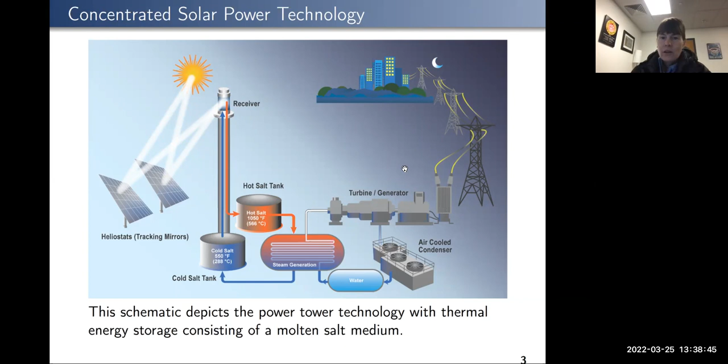It's got a very storied career. It's functional now, more or less. There's been a lot of issues. This is a mechanical engineering situation with the parts. So I mentioned that we had molten salt cycling through.

Well, most of the heat exchangers, like the evaporator, superheater, preheater, reheater, all those components, they're used to having water and steam go through them. And now all of a sudden it's like, well, we're going to put salt through you guys. And people thought this would just be fine and there'd be no problems, but no one really did simulations to figure out that there might be problems.

So that's been some of the issue with this, not so much the operations research or the system optimization associated with the power tower technology, but rather just the way that the moving parts function. And that will come up when we look at the objective function and what makes a particular dispatch strategy better or worse. Right? But so this is the main one we have here.

And unfortunately, that's an implicit model, but I'll talk just a little bit about that before I talk about the explicit dispatch, which is also not easy. All right, so this is mainly work with John Cox and William Hamilton, and they've been looking at this hybrid optimization performance platform framework. This is something they've been developing inside the National Renewable Energy Lab.

And on the left-hand side, you see a macro view of what they've done, the concentrated solar power with thermal energy storage, the photovoltaics and the battery, within the so-called System Advisor Model, which is a piece of simulation software that looks at the fluxes and all these mechanical engineering style aspects of the system. It evaluates, if you give it a design, what is the utility of that design in terms of the power output and the amount you could possibly sell, and what you might have to pay in costs for parasitics and operations and maintenance.

And so that design is actually hooked to this dispatch I'll talk about in a minute here. And there's this back and forth with evaluating a dispatch relative to a design to try and figure out the best design. But as you might imagine, there's very few variables in this type of model. We can only vary a few things at a time because the evaluations are extremely expensive. And like I say, they're black box.

So we've been doing a little bit of work in that sphere, not because we can influence Tonopah, that plant's already been built, but there's been some international interest in, for example, parts of Northern Africa, as well as other places in the world: South Africa, China, Australia, Spain, Northern Chile and the Atacama Desert. These are all places that really lend themselves to this type of concentrated solar power, so desert atmosphere. And then the right-hand side is just a schematic of how the gray inset on the left-hand side works.

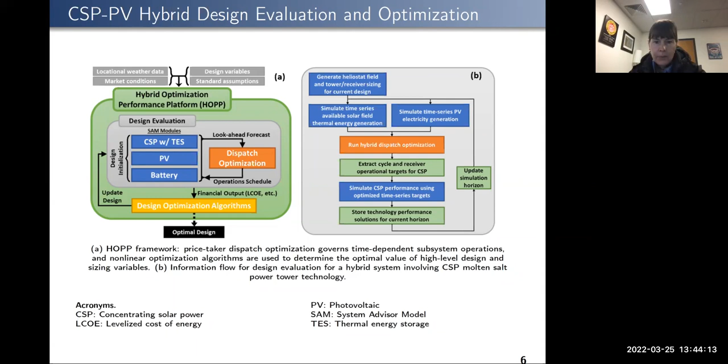So what we can kind of see from some of this is if you look at the design, you actually can be much better off than you might think otherwise, or than people did, for example, when they built the Tonopah plant. So nobody was really into optimization at that point. And so nobody thought about, well, what should we do? It was also difficult to characterize what various designs would yield in terms of operations and maintenance costs, or even profits and so forth. And so now that we sort of have a benchmark, we can say, well, things could be a little bit better.

And so for various pricing strategies, the Pacific Gas and Electric in Northern California, sort of in the Bay Area, and then these pool price, two-tier, and then the California Independent System Operator. Just looking at a few of the different pricing strategies, you can see that if you're looking at this black box optimization in which you want to sort of minimize flux, or kind of what you're putting on the receiver that's going to stress it, and you want to also minimize costs associated with running your plant, for all of the pricing schemes, looking at this sort of black box optimization, you can do quite a bit better in terms of the power purchase agreement price and in terms of the maximum flux.

All those negatives are improvements because we're trying to minimize. So we want our power purchase agreement price to be lower because then we're more competitive in the market. And we want the flux to be lower because then from a mechanical engineering perspective, we are treating the system, the metal and so on, better. So then the overall objective, when we kind of looked at this bi-criteria optimization problem, was a reduction between about 15 and 23%, depending on the pricing structure we're looking at. So that's kind of a really high level overview to the design problem.

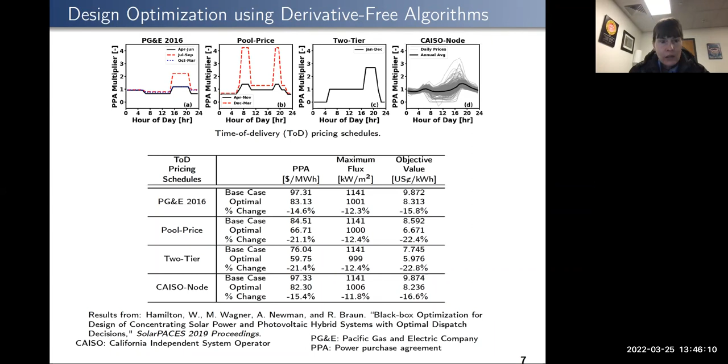And so what we'd like to do now is sort of take that design as fixed and go into the dispatch. And so now we're back in a more comfortable sphere, at least for me. So this is an explicit, I emphasize, mixed integer. In the first instance, we had a linear program. It was going to maximize the revenue generated from this electricity sales. But of course, we have other components in the objective. There's kind of 10 or 15 different terms, because not only do we have to take into consideration how much we can sell for, which is given by contract. So that wasn't something that we were optimizing.

So we were looking at that, but then the parasitics are used to run the plant. So whenever we decide we're going to dispatch power and correspondingly get the power from the field a certain way, we use some of our power to run all the generators and everything. So those are the parasitics, and we lose some in that. And then, of course, just from the general kind of operations and maintenance standpoint, the startups and the cycles into standby and so forth will cause some wear and tear on the system.

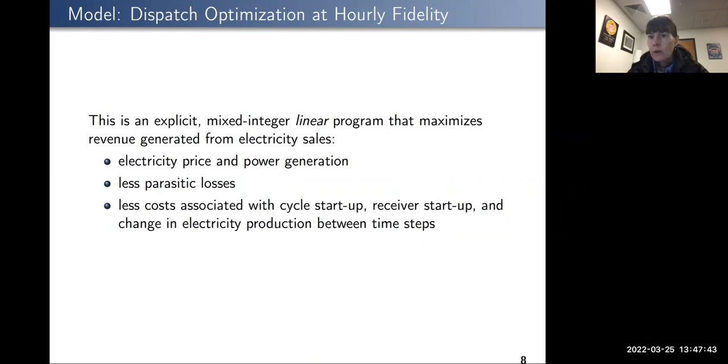And we were lucky enough that we could find, Alex Zolan was super helpful in this regard. He had done work with Dave Morton for his PhD, looking at the nuclear sector. And so there is a report out of Idaho National Labs that was able to get us a lot of the information on how badly the cycling would affect the system. So we were able to take that from a different system and use it in the solar power tower. And that was important because this technology is so new. We don't have a lot of, 10, 20 years down the road, how has all this wear and tear really affected your system? So all those parameters went into the objective as well.

So then we had quite a few constraints. I'm not going to show all the math here, but I have oodles of papers that I'm happy to furnish people with. So we essentially have sets of constraints for the receiver.

And then that was the heliostats in the tower you saw. And so obviously there's constraints on the startup and supplies and demands, the capacities, the logic governing the mode at which you're in. Like you can't be in standby if you haven't been running beforehand, or you can't shut down if you haven't been on for a certain amount of time, those kinds of things. And we have analogous considerations, again, all linear constraints for the cycle, the power cycle, that Rankine cycle you saw a little bit to the right of the heliostat field.

So I want to bring your attention just to a single constraint. My convention here is I've got capitals for the parameters and lowercase for the variables. And so I'll just sort of read off to you what the constraint says, but it's essentially looking at the inventory balance. And so what we're looking at is like, how much do we have in storage? Like how much in that storage tank? And so what we have in storage in time t is what we had in t-1 plus some conversion from power to

energy. And then that's just a function of what we've been generating at the receiver, the XR, less the heat that's been emitted for various things. So the Qs are all heats. That's a common mechanical convention. And then also the XT would be from the power cycle, the generation from the power cycle. So that's kind of a simple balance of flow, inventory balance constraint. We saw those in Jorge's model as well. And you notice that while the Ys are binary, the storage and the power generation are continuous.

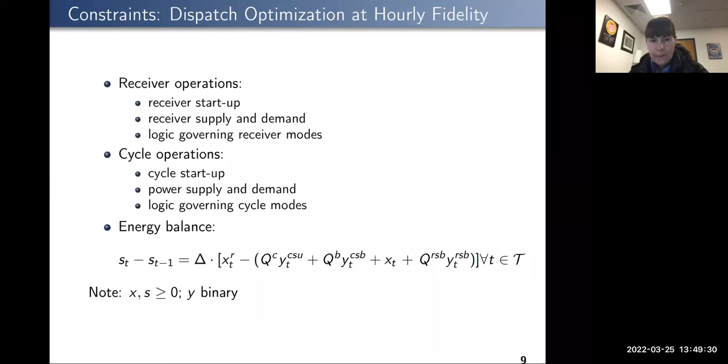Okay. So what we did is we had various metrics of interest we were looking at for this sort of longer term model at hourly fidelity. We looked at a representative year. And so we looked at rules of thumb that people would use to dispatch versus what our model would give. And we see that we have a little bit less on sales and a little bit less correspondingly of the net electricity output. So you might think, well, that's not very optimized.

But what you notice is that we have huge improvements in terms of the way in which you're running the system. So all the wear and tear caused by the turbine starts and cycles, we've really been able to mitigate by trying not to shut it down and then restart it, just to capture that last little ray of sun at the end of the day, for example, if there's been a cloudy period. And so where we really gain in this model, and where you gain a lot of times in optimization models, is not just doing the greedy intuitive thing, which is how do I get more money? It's always looking at the trade-off between, well, you get more money, but it's at a price. And are you willing to pay that price to get the revenue?

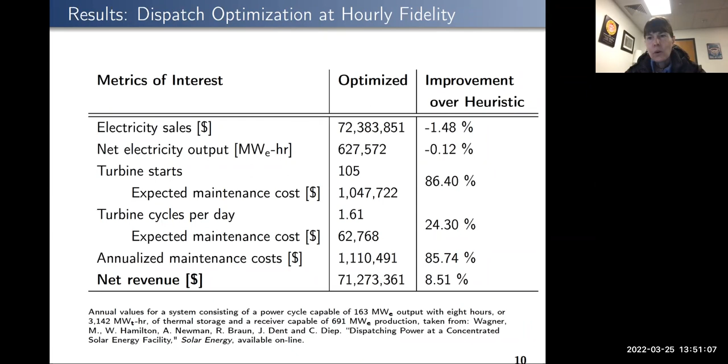And so we contend that, for our particular example here, a 1.5% decrease in sales is definitely more than offset by the gains we get in not having to do all that maintenance on the system. And so that's available with the details there. And at the bottom, I have a little bit about the system, the size of the system and so forth. So that was sort of one chapter. And then we moved along to the next chapter.

So we have this little cartoon again, and it's coming back at you. It's not because I forgot that I already showed it to you. It's because I just said we had this energy balance, and you guys probably noticed I had an S sub T, and that was the energy at time T, but the energy isn't just in one tank. We had, for the astute observer, 2 tanks, a hot and a cold.

And so if we really want to look at real-time dispatch instead of just, all right, let's dispatch optimally, see what we can do generally speaking, to get a view of the system at an annual kind of horizon, we actually have to be much more discriminating in how we're modeling what's going on in the system. And so how we want to model this is the dispatch we want to put in 5-minute increments. And so now for people who are familiar with energy markets, you might say, yeah, that's a little bit more what you're going to have to do to play into those energy markets.

So first hour at 5-minute fidelity, and then the next 3 hours at 15-minute fidelity. So with those 15-minute fidelity periods, you're not going to dispatch at that fidelity, you're going to dispatch at the 5 minutes, but at least it informs what's going on. And then for the next 20 hours of the day, we're going to just do hourly fidelity again. We usually have a 48-hour look ahead. That's standard in these kind of market models.

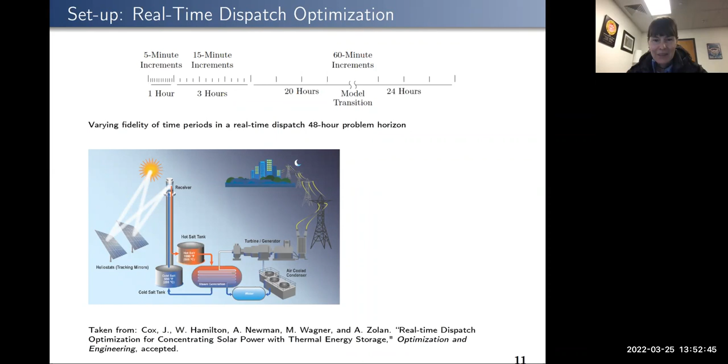And so we have a model transition. And we'll talk about that transition later. But we're doing something different in the first day than in the second day, not just with respect to the finer time fidelity, but also with respect to some of the math. All right, so now we need our picture. So John Cox put together this extremely famous picture, and it will appear in a museum someday, I'm sure.

So up at the top, we have the hot and cold tanks, and everything just mixed together, and we just got storage, and it's all just kind of in there. And so that was nice because it was linear. But you want to know, right, that's not the real world. The real world is often non-linear. So in the real-time model, we decided to take this fidelity to separate out what's going on in the hot and cold storage tanks. So the TES, again, that's thermal energy storage.

And so now instead of just some sort of energy balance and that generation being the X, now we have in lowercase letters a mass flow rate of the receiver for the hot storage and the mass flow rate at the cold storage, and also the temperatures at the inlets and outlets. And so this is going to yield a much more complicated model.

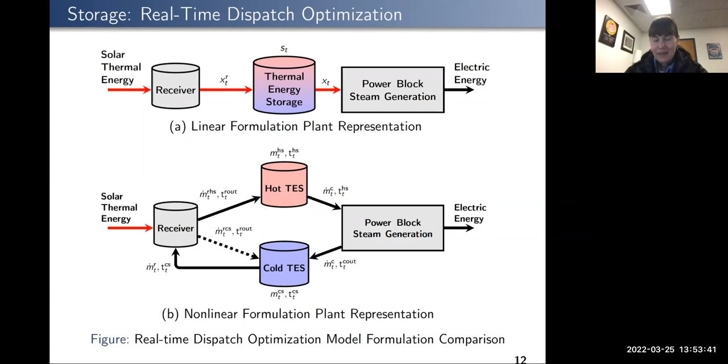in a nonlinear fashion. So now that nice energy balance, it was just S_t is equal to S_t minus 1, right? Like we're used to, like in a manufacturing facility or something. Not anymore. Every single term in blue, which is basically everything, is nonlinear. It's a bilinear term composed of 2 continuous variables. And so you can sort of see similar tenets here. What we have in t is what we had in t minus 1 plus some stuff going in minus some stuff going out. But the thing is that this is highly nonlinear, and this is just the energy balance.

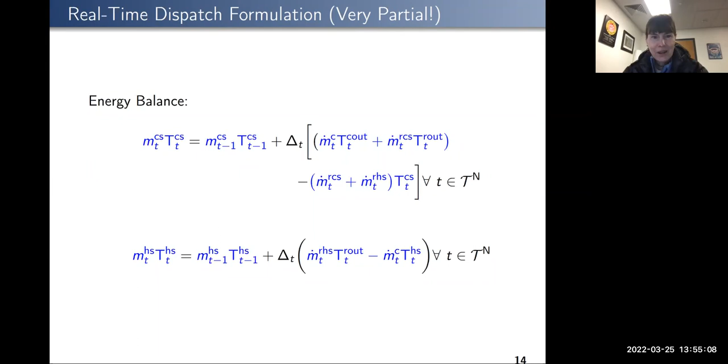Also notice we now have 2 constraints instead of 1 because we're looking at what's going on the cold side and what's going on the hot side. So then we also have a lot of other nonlinear constraints, but I would run out of time telling you about them. So this is a good example of how bad things really are. So let me just mention here that, on a 48-hour time horizon with the time fidelity I showed you in the timeline earlier, we've got problem instances containing thousands of variables and constraints.

We do have binaries for the starts and stops. We have a lot of continuous variables as well, and the product of those continuous variables makes things quite difficult. So if we're using Gurobi, we've modeled this all in AMPL, we're getting about 10% relative optimality gaps after 12 hours. So this isn't going to do. You can't use this for real-time dispatch like that, right? So what are we going to do?

So we did a few things, and I just wanted to highlight a couple here. There's some kind of, I would call them cuts. They're on the continuous variables, but we try to sort of tighten some things up on the continuous variables. Then we tried to discretize this mass flow rate. It's a continuous variable, and we tried to say, well, you've got to be in each unit. We're going to discretize you, and so instead of between 0 and 1, you get to be 0, 0.2, 0.4, 0.6, and so forth to 1.

So that added binaries, but it also meant that we got tighter relaxations on what we had. The second 24 hours is going to revert to our linear model, which informs us but not at the same fidelity. Still, all we're really interested in for dispatch is just the first 5 minutes, so we think that at an hour 30 it's okay if we're using the linear model.

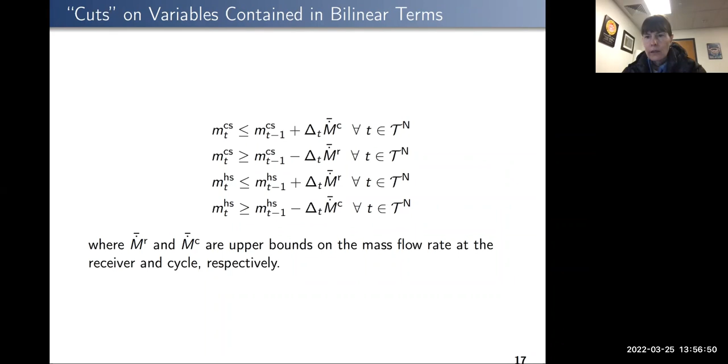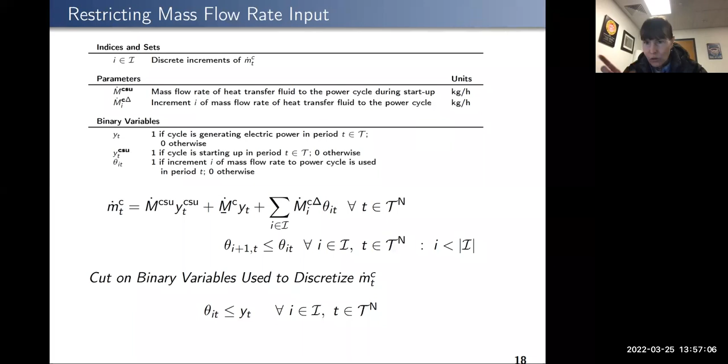Here, these were the cuts. So we went ahead and discretized that mass flow rate, and then we used an additional variable, this theta here, in order to figure out where you are in that interval, between 0 and 1. And then the other thing we did is we relaxed the second half of the time horizon to be the linear part, so you can see the differences in the variables and constraints.

The other thing I wanted to mention is that we had to scale the heck out of this model. We know that it's not very good to have differences in orders of magnitude in your data more than, let's say, 10 to the 10th, even that's not great for a linear model. But we had to be down around 10 to the 5th to get Gurobi to cooperate at all, and the solution techniques are less developed.

We're employing their spatial branch and bound because all the nonlinearities were the bilinear terms. We did have a few more binaries, as evidenced by that discretization of the mass flow rate, but overall there was a reduction in the nonlinearities, also owing to the relaxation in the second half of the time horizon and so on. And so we wound up getting better results.

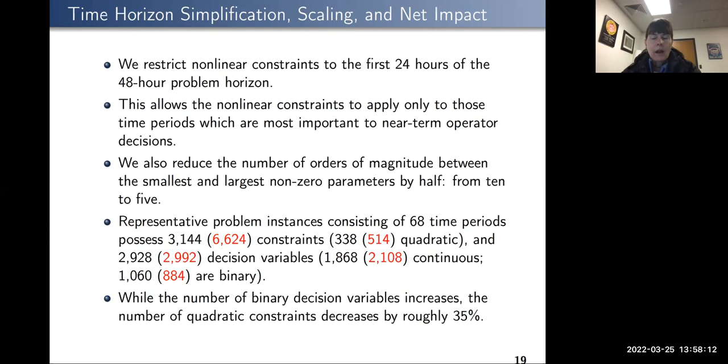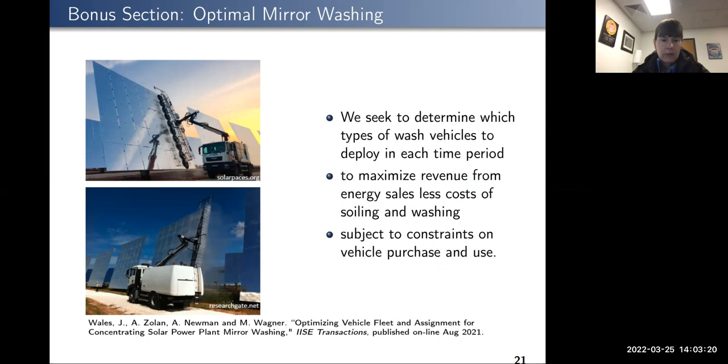The model was a bit simpler, not as much in terms of startup and shutdown, and the nonlinearities were of the format where you had an exact linearization. That turned out to lend itself a little bit better to a slight decomposition technique, whereas the dispatch problem is just grinding away, as far as I'm concerned, mathematically. So I think we're about at time, so I'll stop there.